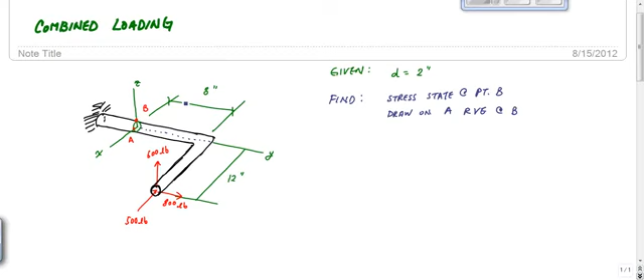Which is 8 inches from here, 12 inches from here, so it's not going to be too bad. But the challenge with these 3D problems is keeping everything straight. But this is all straight up from statics.

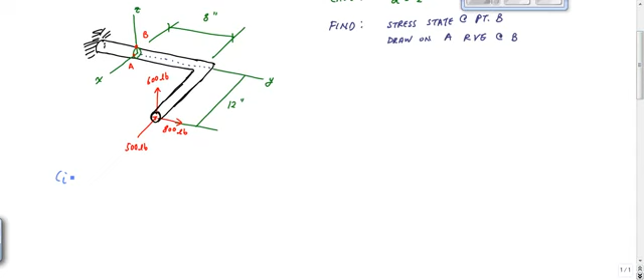So step one, let's calculate the internal loading. This is something we've done since we first started mechanics. It's so fundamental to mechanics, calculating the internal loading, and if you can't do that, your problems are going to probably suffer.

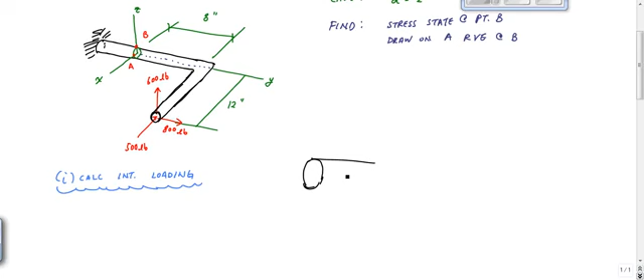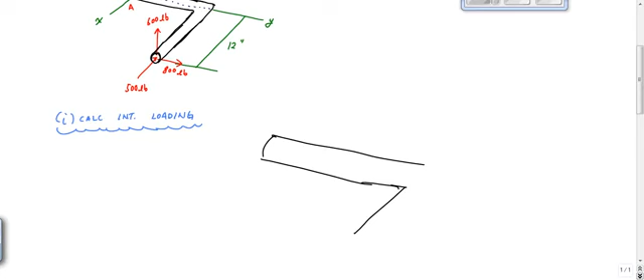If I cut it right here at this 8 inches, I'm going to draw a bit bigger here. So if I make this cut right here, and then the rest of the pipe is coming out like so. Good drawing is important here. Let me cut it like this, and then the pipe is coming out like this right here, and this is the other part of that pipe.

When I add the shading, does that look like it's 3D? Not really, huh. Gosh, that's why I'm not a graphic artist or anything. But here, this is 600 pounds, this is still 800 pounds, and we have 500 going into this way.

What you want to do here is important: I have this cut surface right here, and you want to make sure you draw the coordinate system the exact same way. So here I have x, z going straight up, and y coming out right here like that. Instead of trying to remember positive bending, negative bending, or anything like that, you just know that you have 3D, so you have moments and forces about each axis.

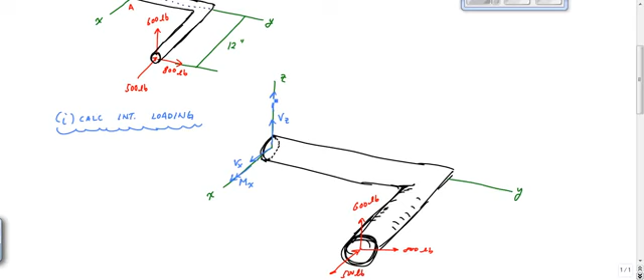So on the inside, internal loading wise, I have a shear force in the x and a moment about the x. This is how I'm going to draw it. I have a shear force in the z and a moment about the z, like this. And then I also have a normal force in the y and a moment in the y.

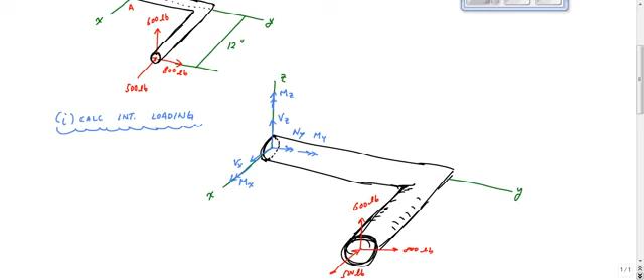So I'm going to worry about what's in compression, tension, what direction the stresses are going based on these arrows later. I'm not going to try to overthink it and apply some positive sign convention to this and get confused. So I have that right here. Now I'm going to apply equilibrium about each axis and calculate.

In this problem there are 6 equilibrium equations, so we're going to go one at a time. Let's start with x: sum of the forces in the x equals 0. This way is positive x, so Vx minus 500 pounds equals 0. That tells me Vx equals 500 pounds.

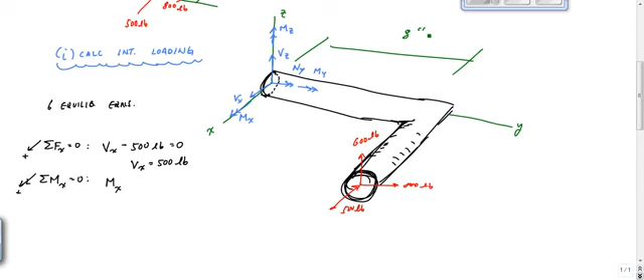Then sum of the moments about x equal to 0, with moments about x this way. In this case I'd have Mx. What induces a moment about x? 800 pounds is on the xy plane, so no. 500 pounds is also on the xy plane, so there's no distance that causes rotation about the x. But I have 600 pounds times an arm of 8 inches — this distance was 8 inches, and this was 12 inches right here.

So I have Mx, and this induces a positive moment about x: Mx plus 600 pounds times 8 inches equals 0. Everyone okay with that? That looks okay, I can live with that.

Then sum of the forces in the y equals 0. If you're watching this video right now, you might want to fast forward this. Sum of the forces in the y equal to 0, this is plus, so Ny plus 800 pounds equals 0, and that tells me Ny equals minus 800 pounds.

Then I do sum of the moments about y equal to 0. Do I have any moments? I'd have My, and then minus 600 pounds times 12 inches equal to 0, which tells me My equals 7,200 pound-inch. This is the most important part of any problem — you have to do the internal loading right.

If you can't apply equilibrium or internal loading, it's going to be tough to do anything else.

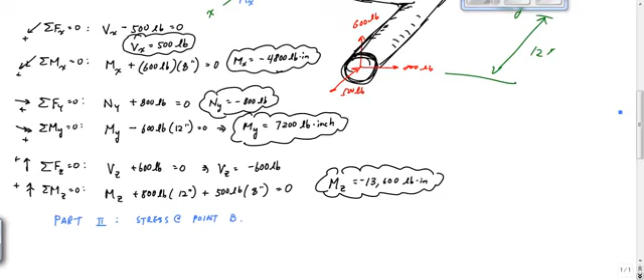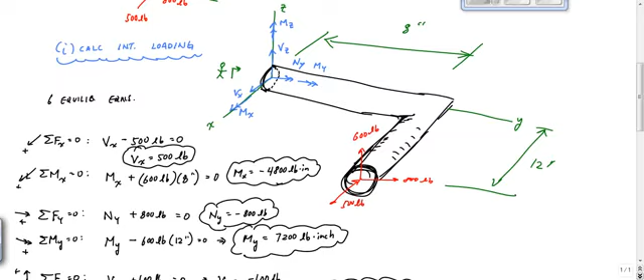So let's start with the shear Vx. Does Vx induce stress—let's start, I'll call this number 2. This is Vx right here, which if I look at my cross section, I'm going to draw my cross section as an observer for this problem, standing over here looking this way at it.

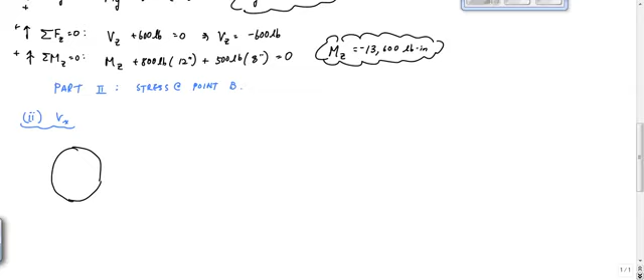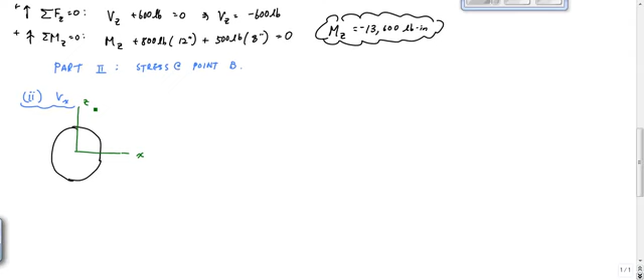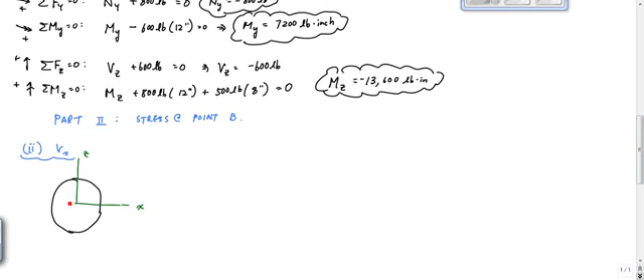So what I would see as the observer for Vx in particular: here's my cross-section. Y goes into the page, X goes to the right, and Z goes upwards. Did we get a positive or negative number for Vx? We got a positive number, so that means Vx goes like this. Vx is on that surface here, and point B is right here.

So the question is, does Vx induce a stress at point B, and if so, what type of stress is it? Yes, and shear are the correct answers. Absolutely. So the shear stress at B, tau B, due to Vx is Vx times Q over I times T.

And at point B here, we know Vx, we know the direction, and we can calculate I. I is equal to, looking on the equation sheet, pi r to the 4th over 4. T is the width of that section, which in this case is the diameter, 2 inches. This is pi times 1 inch to the 4th over 4, so this is pi over 4 inches to the 4th.

And then Q is the first moment of area of this right here. So Q equals sum of A prime times Y bar prime, which is essentially the area of the half circle, pi r squared over 2, times the centroidal distance to the semicircle, which is 4 over 3 pi times 1 inch. That's 2, that's pi, and that gives 2/3 inches cubed. Look at how nicely that works out.

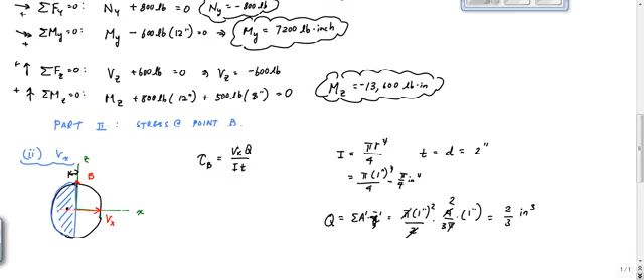Wow, okay. And so the shear stress at B is equal to—what did we say the force was? 500 pounds, times Q, which is 2/3 inches cubed, divided by I, which is pi over 4 inches to the 4th, times the thickness at that location, 2 inches. And that gives me...

I don't know what that gives me. It gives me some number in PSI. Anyone have a number? Calculator. Robot. Dude, it's been a long time—you guys have spent a lot of time with me today.

I don't know, man, I feel like two hours is a threshold with me. There's a period where I become unfunny. Although I'm sure some of you don't agree with that, right? Anyway, okay—212 point what?

2 psi. All right, there's one down. Let's check some more, right? Okay, so here, let's go to now number 3.

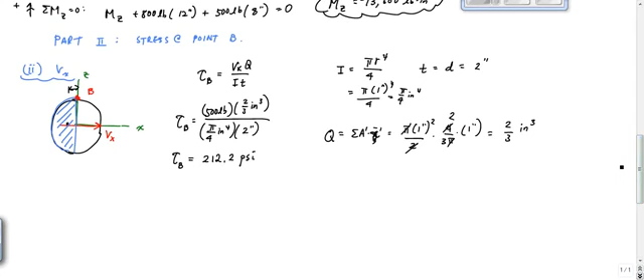Let's check the moment about x, which we found. Again, I'm gonna draw that cross section. I like to draw the cross section because it helps me keep things in order. Here's X, here's Y, and here is point B.

Did we get a, what did we get for MX? Was it positive or negative? It was negative 4,800 pound inch, which tells me that it goes this way, 4,800 pound inch. So does this moment about X - whoa, I almost messed that up. I'm confused everybody, this should be Z and Y should be into the board. Right there, it should be a Z.

And so now does this moment, 4,800 pound inch, induce a stress at point B? And the answer is yes, and it is normal, just like me. Normal, right? Normal stress at B.

Normal stress at B is equal to, oh snap, you know we had this minus My over I equation, but I don't know if that still works here. I recommend that you just calculate the magnitude of this stress, mxz over ix, okay?

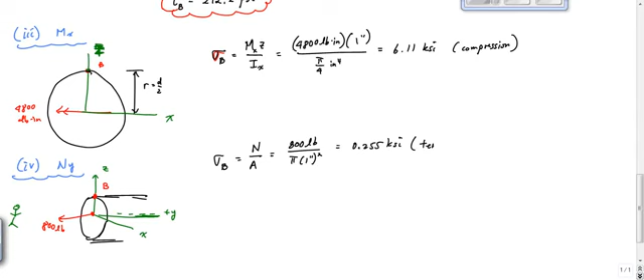0.255 KSI. And we're not, even we know that this right here pulling on the surface means what for that point B? Compression or tension? Tension. So we want to note that as well, tension here. Okay, great, okay let's keep going.

Now we have a moment about y. So here, I gotta break up a page here. Because I know that the direction of my 800 pound, I know this is in tension because the direction of my 800 pounds is this way, and it's pulling on the surface, on this area right here, that surface. Can you see my cursor? Okay, all right, so right there. Okay, so that 800 pounds is causing tension.

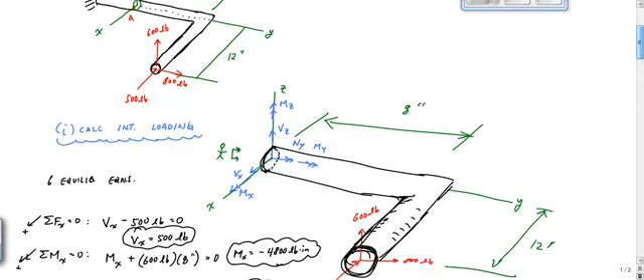Now I want to look at the last part, 5 - it's not the last part, I'm sorry. It's the torsion, moments about y, My, here. And why don't I keep the same 3D type of drawing here? So let me redraw that surface again, like that. And I know this is redundant and repetitive, but I just don't want there to be any confusion. X and then Y right here. And I really can't break this down for you any better than what we're doing right now.